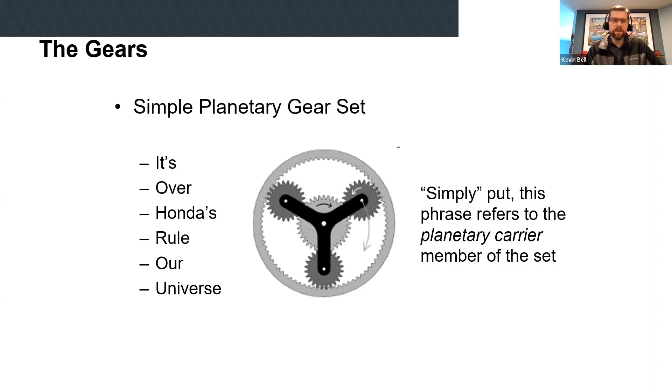This little phrase is referencing what we do to the carrier assembly of that simple planetary gear set. So the carrier assembly, that's the piece in the middle that is connected to my planetary pinions. Right? Planetary carrier, carrier assembly, different manufacturers will call it slightly different things. It's the carrier. So I-O, H-R-O-U. That's the order of the letters you guys need to remember. And each one of these breaks down into a pair.

So when we said it's over, the I represented input. So what I'm saying is if the carrier is the input, there's my carrier assembly right in the middle. Let me redraw that. I want to point to the sun. Right. So there's my carrier assembly, that big Y guy right in the center. If the carrier is the input, then what we're going to achieve is overdrive. You guys remember the definition of overdrive, underdrive, direct drive. I'm not going to spend a ton of time going through that.

If we overdrive something, it means the output is spinning faster than the input. That's what an overdrive transmission is. If we underdrive something, that means the output is spinning slower than the input. Underdrive, first gear, second gear, third gear, right? 4-to-1, 3-to-1, 2-to-1, those are all underdrive ratios. Because when we underdrive something, while the speed goes down, the torque goes up. Well, that's going to get the car moving for us. That's going to get the truck moving for us.

Then as we start to accelerate, we run out of speed in that gear and we shift into the next underdrive and then the next underdrive. And then we get into a direct drive where we have a 1-to-1 ratio. So my torque and my RPM are exactly the same on the input and the output, excluding any frictional losses. And then we get into an overdrive where my output is actually spinning faster than the input and the speed has gone up, but the torque has gone down.

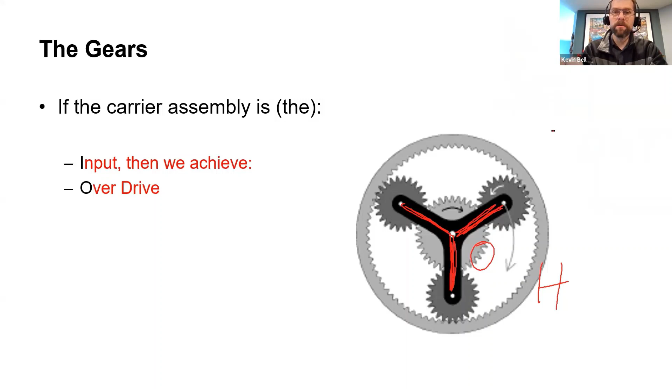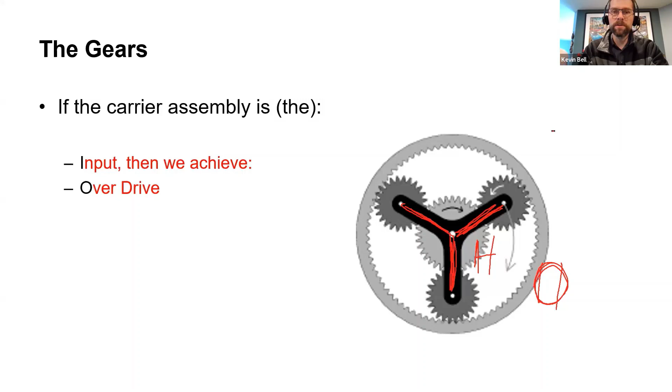So getting back to my it's over Hondas rule our universe, if the carrier assembly is the input, so there's my carrier assembly. If we bring torque into this carrier assembly, we drive this carrier assembly, we are always going to achieve an overdrive. Doesn't matter if I hold the sun gear, if I hold the ring gear and the sun gear becomes my output, or if I flip those around and I output my ring gear and I hold the sun gear, doesn't matter which operation, I'm still going to achieve an overdrive. And I'll show all of this to you guys in a second. In fact, why don't I take that right now?

So I am going to take you over to this camera. And I'm going to pause that screen for a minute. So make sure that you guys have got your camera kind of wide open, bright-eyed and bushy-tailed, so you can see my little Consulab planetary gear set there. And we said that it's over Hondas rule our universe. See if I can do this without getting my headphones in the way here.

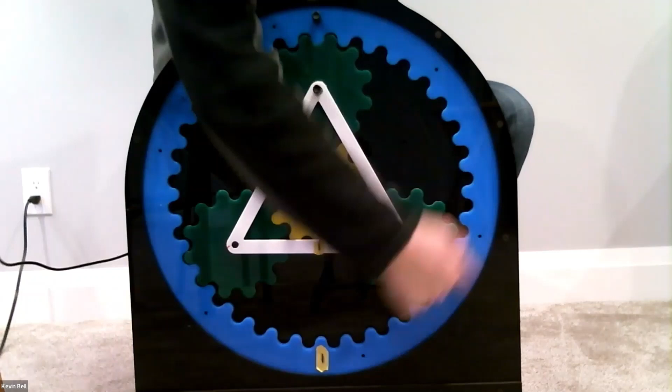So there's my simple planetary gear set. There's my ring gear around the outside. Pretty easy, pretty obvious. There's my sun gear in the center. And of course, there's my planetary carrier, which is pinned to those 3 green gears. So there's my simple planetary gear set. And of course, everything can rotate as a whole. I can rotate these guys around. You'll see that in a second.

We said that if the carrier is an input, then regardless of what I'm holding or outputting, I'm going to achieve an overdrive. Well, here we go. Watch this. So here's my carrier assembly. So I'm going to spin the carrier assembly.

What you guys need to focus on is the output being the sun gear. All right, because I'm going to hold onto the ring gear. So the ring gear can't go anywhere. And I'm going to spin the carrier assembly. Well, look at the speed of that sun gear as an output in relation to the speed of my carrier, which is the input. Is that sun gear spinning faster? Sure, absolutely it is. It's spinning way faster. In fact, I can tell you it's spinning about 4 times faster.

So if we go to this point, so we've got everything lined up, we can watch: there's 1 rotation of the sun, 2 rotations of the sun, 3 rotations of the sun, 4 rotations of the sun, and then back to where I started. So my output spins 4 times faster, or expressed as a ratio, that would be 0.25 to 1.

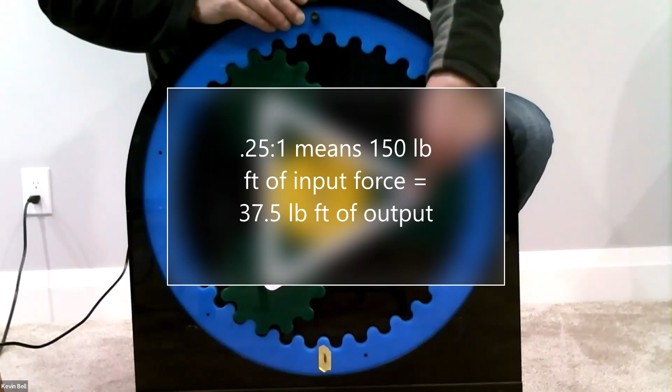Because watch what happens when I rotate that carrier a quarter of a turn. My sun gear has gone 1 full turn, so there's my output. There's my ratio, blank to 1, something to 1. My carrier only went a quarter. So it's 0.25 to 1. Doesn't matter what I hold or what I output. If the carrier is the input, I'm always going to achieve an overdrive.

So we'll flip this around, and I'm just going to pin my sun here, so my sun becomes the held member. And now when I drive my carrier assembly, my input is the same, right? I'm still driving the carrier, but look at my output. Well, now my output happens to be the ring gear. And we can see the ring gear absolutely spinning faster than my carrier is. And eventually, as I go all the way around, these 2 guys will line up again. So we're full at the top, we're lined up.

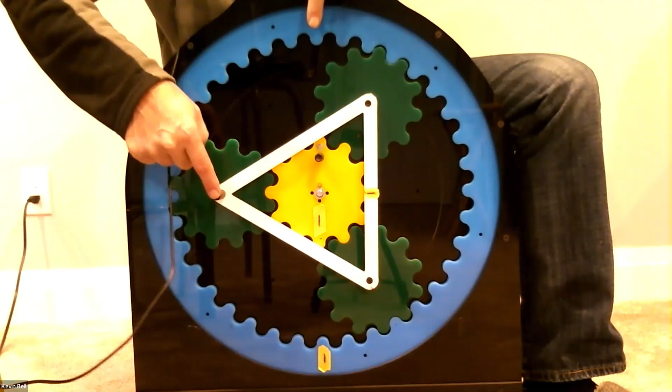Well, let's look at the ratio on that one. We said that if the carrier was an input, I was going to achieve an overdrive. Well, let's see what it takes to get me 1 full turn on the output. So here comes my ring gear. My ring gear is right back to where I started, and I had about 3/4 of a turn on that carrier. So my gear ratio is 0.75 to 1. Right? 1 full turn of the output required 0.75 turns of the input to get me there.

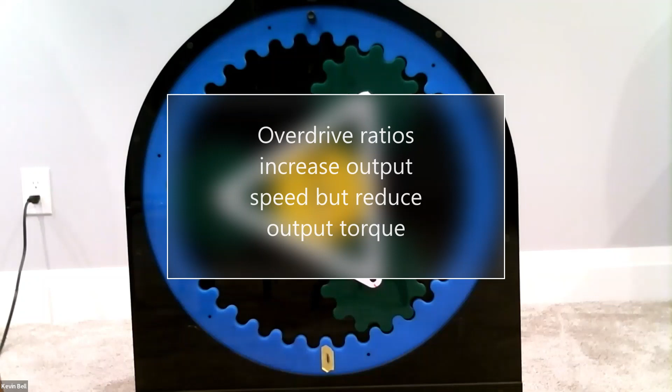Both of these scenarios are overdrives. So if the carrier is the input, it doesn't matter if I'm holding the ring gear and the sun is the output, or if the sun is being held and the ring gear is the output. I get 2 different ratios. One of them we said was a 0.25 to 1 ratio. The other one was a 0.75 to 1 ratio, but they're both overdrive ratios. So if you input the carrier, you are always going to get an overdrive application in a simple planetary gear set. So far, so good. We understand the I/O, the it's over part of it.

Awesome. Let me flip back to this guy for a second. I got my cable all wrapped around my head here. I'm going to strangle myself in a minute. There we go.

So that was the I/O, right? That's the it's over part. The over is easy to remember because the over turns into overdrive, right? So it's over just turns into input and then overdrive. The second part, or the second third, if you will, because there's 3 parts to this, is the HR. Well, the Honda's rule turns into held and reverse. And that simply stated means that if we hold that carrier assembly, we are always going to achieve reverse. We will have a fast reverse and a slow reverse, but we are always going to achieve reverse.

And what you guys might want to do as we're kind of motoring along here is just put a little symbol between those two, indicating that those two are tied together as a pair. And of course, the next one we come to will also be tied together as a pair. So if we hold that carrier, we are always, always, always going to achieve reverse. And as I said, we'll have a fast reverse and a slow reverse, but we're always going to achieve reverse.

So let's go back and have a look at that planetary gear set again. And we said we are going to HR, right? So we're going to hold that. So let me line these guys up one more time, spin these around, just because it makes the visualization a little bit easier. There we go. So now we said we're going to hold the carrier. So again, silver triangle, that's my carrier assembly. I'm going to hold that carrier. I'm going to put my little magic holding device in here somewhere. Where's the pin? Oh, pin's over here. Okay, that's fine. We'll just go like this.

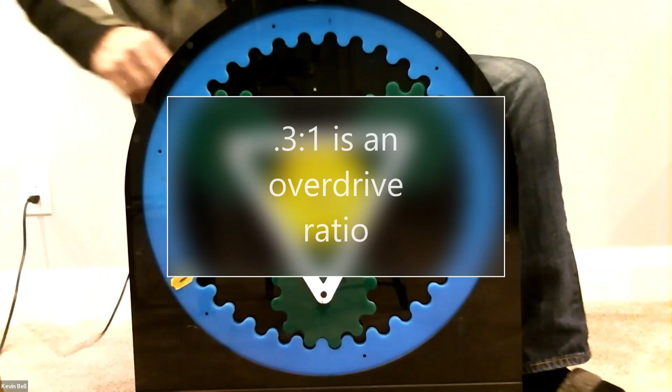There's approximately one rotation out of that sun gear. And I went, I don't know, maybe about a third. I started off over here and wound up over here. So I went about a third of the way. So we have a ratio of approximately 0.3 to 1 in that reverse scenario. We said the other possibility was the sun gear is the input, which would make the ring gear the output. So if I drive the sun gear, you can clearly see that that ring gear is now going counterclockwise.

What's the ratio on that one? Well, let's see. What's it going to take to get one revolution of that ring gear? Because remember, the ratio is always expressed as something to 1, and that 1 is the output. So what's it going to take to get one full revolution of that ring gear? Well, there's 1 on the input, 2 on the input, 3 on the input.

So I've got a 3 to 1 ratio if I drive the sun, hold the carrier, and the ring is the output. Or if I drive the ring and the sun is the output, I have a 0.3 to 1 ratio. So I've got a fast reverse and a slow reverse. I have an overdrive reverse and I have an underdrive reverse. We're not too concerned about the ratios.

Obviously, we don't have 2 reverses in a car, but the moral of this story is that you guys understand if we hold the carrier, we are going to achieve reverse, because the only other possibilities are now input and output. And it doesn't matter if I input the ring gear and output the sun, or if I input the sun and output the ring gear, I'm always going to achieve reverse. One will be a fast reverse, one will be a slow reverse, but I'm always going to achieve reverse. And in a simple planetary gear set, that's all we're trying to accomplish.

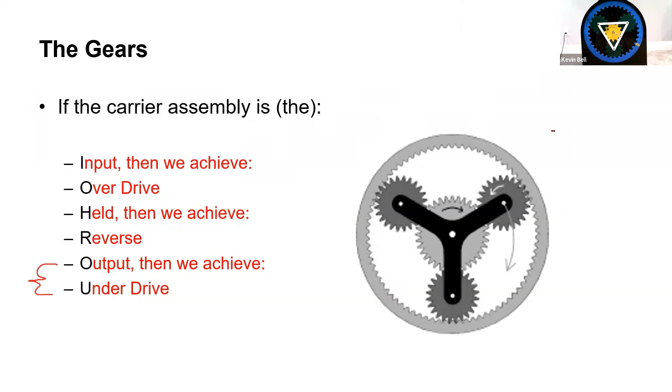So if the carrier is an output, that means that my ring gear is going to be the input and the sun gear is going to be held, or the sun gear is the input and the ring gear is held, either the sun or the ring, but the carrier always has to be the output in this particular scenario. So there's the last one that you kind of want to group together, right? So those guys are a pair. And again, we're talking about the carrier assembly. All three of these are referencing this carrier assembly.

It doesn't matter what we do to the sun. The sun could be an input, the sun could be held, the sun could be an output, or the ring gear could be held, input or output. This little rhyme, this little phrase, this little meme, it's directly related to the carrier assembly. What are we doing to the carrier? And if we know what we're doing to the carrier, then we can very quickly figure out what we're doing to everything else. So the last couple of points on here, output.

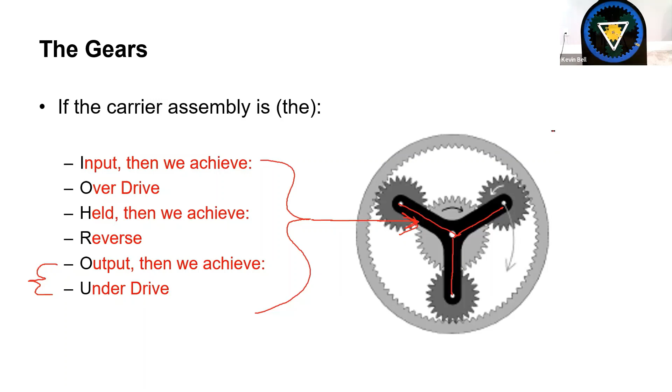Well, if the carrier is going to be my output, then I'm going to achieve an underdrive each and every single time. Doesn't matter if the sun is the input or the ring is the input or the sun is held or the ring is held, because those are my only possible choices. I am going to achieve an underdrive every single time. Let's just get things lined up. So if we hold that ring gear, hang on to the ring gear, the carrier is going to be our output. Well, that means the sun gear has to be the input. And we said it's over.

Honda's rule, our universe. Well, we're going to have a U, our universe. The U represents underdrive. Well, look how fast that carrier is going to spin in relation to how fast the sun gear is going to spin. Is it spinning slower than the sun gear? Yep. Everybody nod their head. Yeah, absolutely it is. If the output is spinning slower than the input, then we have an underdrive.

How much of an underdrive? Well, let's see. What's it going to take to get one full rotation of that output? So there's one rotation of the input, two rotations of the input, three rotations of the input, four rotations of the input. So I have a 4-to-1 underdrive. There's my underdrive, which would be a pretty realistic first gear in a lot of today's transmissions, a lot of today's scenarios. So that would be one example of achieving an underdrive.

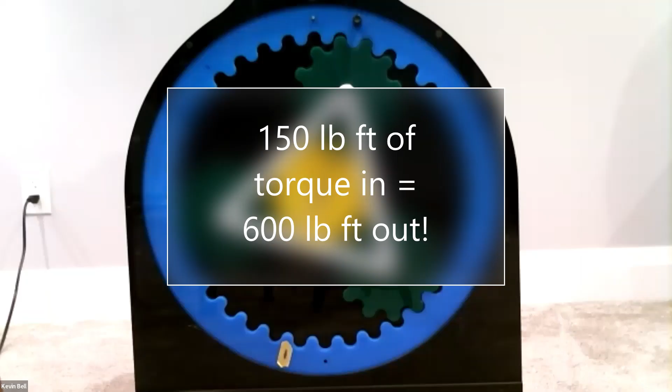The other example of achieving an underdrive would be to hold the sun gear and drive the ring gear. So let's just flip that around, because we still want the carrier to be an output. So let me just put a pin in my sun gear here so it doesn't go anywhere for me. Perfect. So there's my sun gear pin, so it can't go anywhere. So we're holding the sun gear, we're driving the ring gear, we're still looking at the carrier as an output. Let's see what happens. Better be an underdrive.

Did it go slower than my input? Absolutely, because there's one full turn of my input and the carrier only went 3/4 of a turn. So it looks like to get one full turn of that output, I'm about 1 1/3, give or take a little bit. So I would have an underdrive of about 1.3 to 1, give or take a little bit. 4 to 1, that's absolutely an underdrive. 1.3 to 1 is absolutely an underdrive.

So I've got 2 underdrives if the carrier assembly is being the output, right? Our universe. If this guy is the output, we are going to achieve a U. What's U? U is underdrive. Make sense? Good. So how many have we covered? We covered the 2 overdrives. We said that if the carrier was the input, then we were going to achieve a fast and a slow overdrive. If the carrier was held, we were going to achieve a fast and a slow reverse. And if the carrier is the output, we are going to achieve a fast and a slow underdrive. So that's 6 so far. I promised you guys 7.

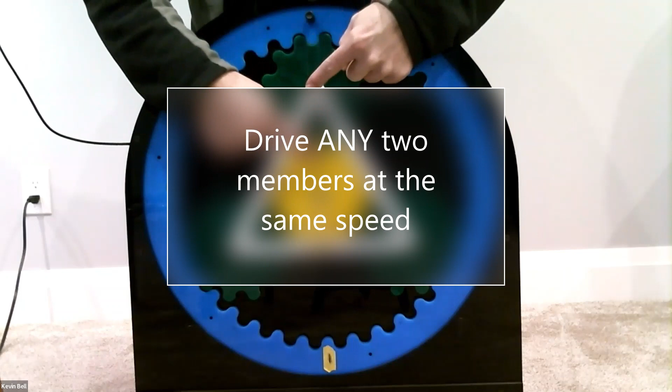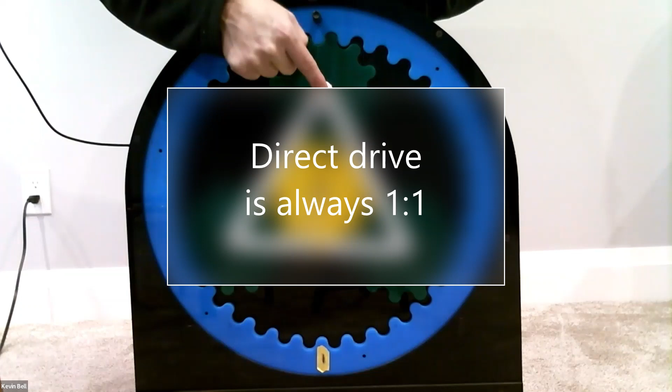To achieve a direct drive in any simple planetary gear set, we're going to take any 2 members and we are going to drive them at the same speed, and the remaining member is sandwiched. It's along for the ride. So watch what happens when I drive the ring gear and I drive the carrier assembly, right? There is no rotational difference between those two components. So the sun gear has to come along for the ride. One revolution of the ring gear, one revolution of the carrier. So these two guys are locked together, and my sun gear comes along for the ride, and I have a direct drive. So if my input were the ring gear and my input was the carrier, then my sun has to be the output. So I'm driving any two members at the same speed.

If I drive the sun gear and I drive the ring gear at 1,000 RPM, then we get them both to the point where they started, I've got one revolution of my carrier. So in that scenario, the carrier was an output. So previously the carrier was an input. It doesn't matter what the combination is. I can take any of these two guys and drive them at the same RPM, and the remaining member has to come along for the ride.

So the catch here is that nothing is being held, because if I'm driving my ring gear and I'm driving the carrier, I can't hold the sun, or the sun wouldn't turn. And if the sun doesn't turn, nothing turns. So to achieve direct drive, take any two planetary gear members, rotate them at the same RPM. Doesn't matter if it's 1,000 RPM or 100 RPM or 5,000 RPM, you will always achieve direct drive if you take any two members and rotate them at the same speed.